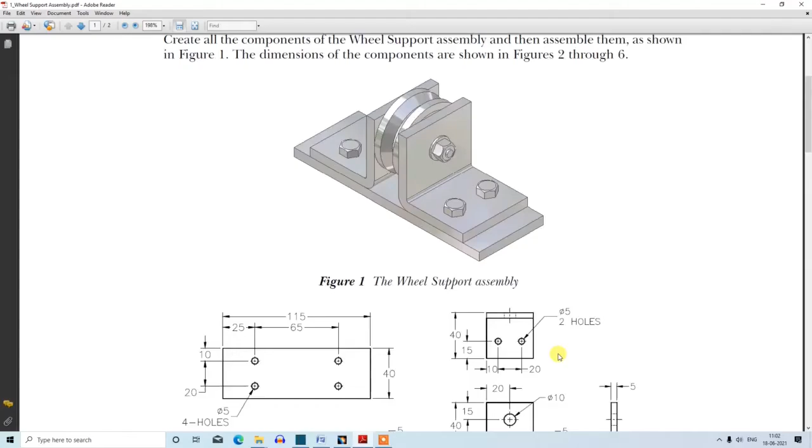So let's begin with the base. You need to have a look over the drawing, understand it, and then we can make it. Possibly try to make each part by hand on your sketchbook. That will really improve your knowledge and understanding of the drawing, and it will also improve the visualization of the part after seeing the drawing. So it is always recommended to make hand sketches and then use the software. It is very easy to use software once you understand the drawing and are able to imagine the part.

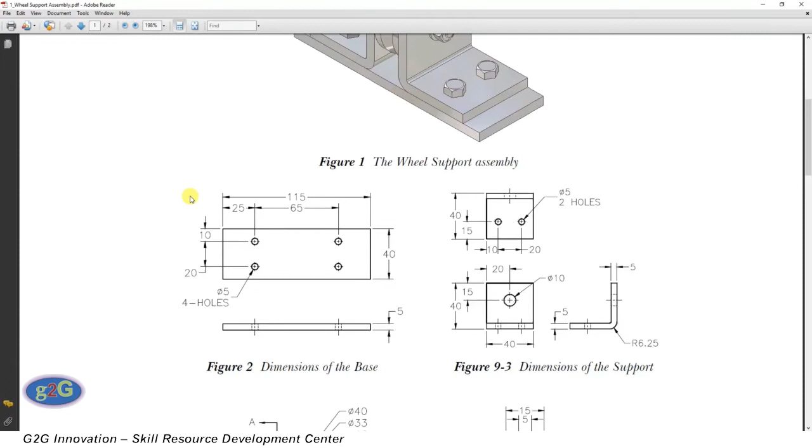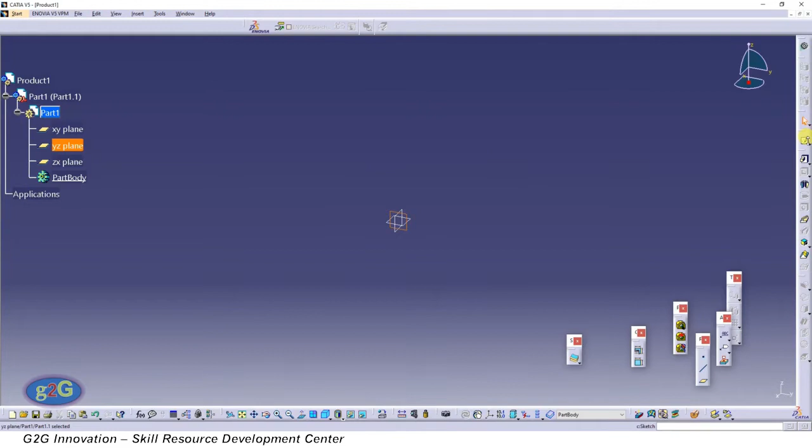So let's begin with this part, that is the base. Let's open CATIA, click on start, go to mechanical design, part design, select a plane. We will select the YZ plane, click on sketch, and then we have a base plate, thickness is 5 mm.

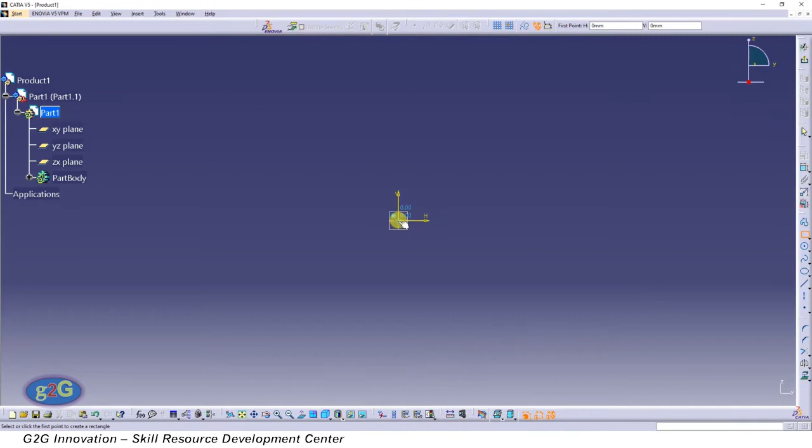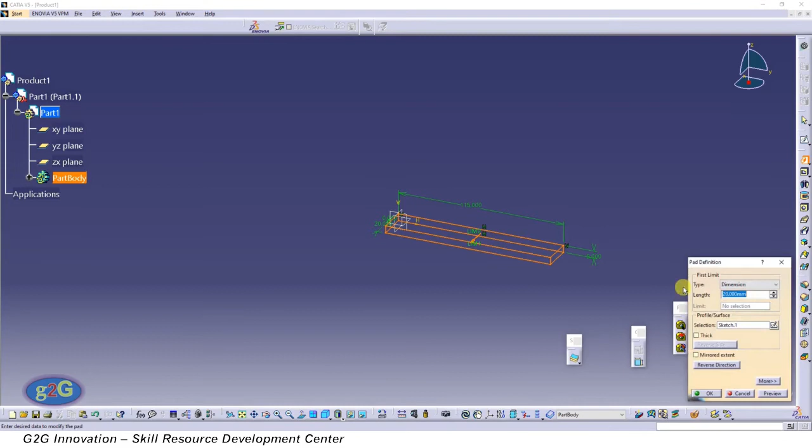So we will make a rectangle of 115 mm by 5 mm. Let's select the rectangle, give the dimension 115 mm, 115, and here we have 5 mm. Let's come out of the sketcher workbench, click on pad, and we will reverse the direction, and we want it to be 40 mm. Preview, click OK.

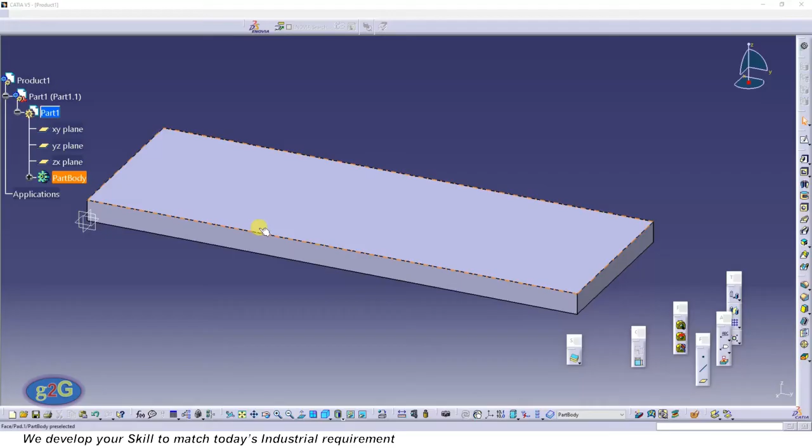So we have a base plate here and we have to put the holes here now. We can do it by two options: either we can use the hole feature here, or we can create a circle on the surface and create a hole. So we will select this face, click on sketch, and we will create a circle.

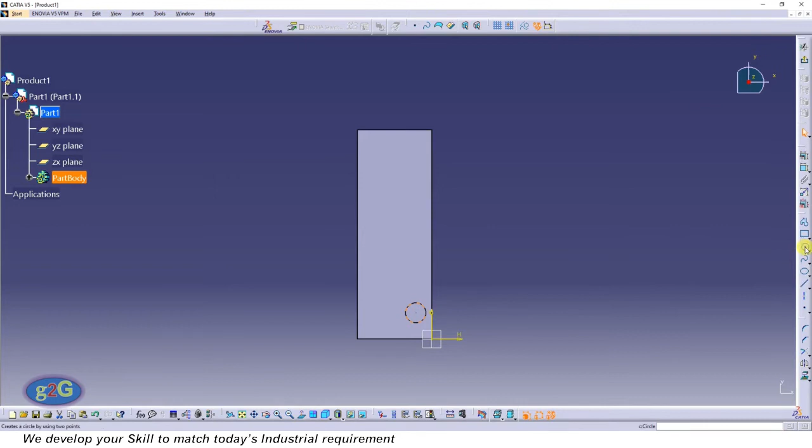Four circles. Let's give dimension to it, and we want it to be 5 mm in diameter. Let's make it 5 mm.

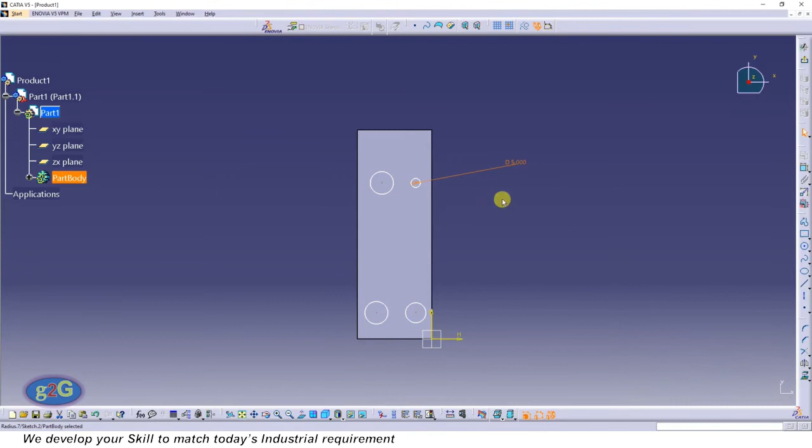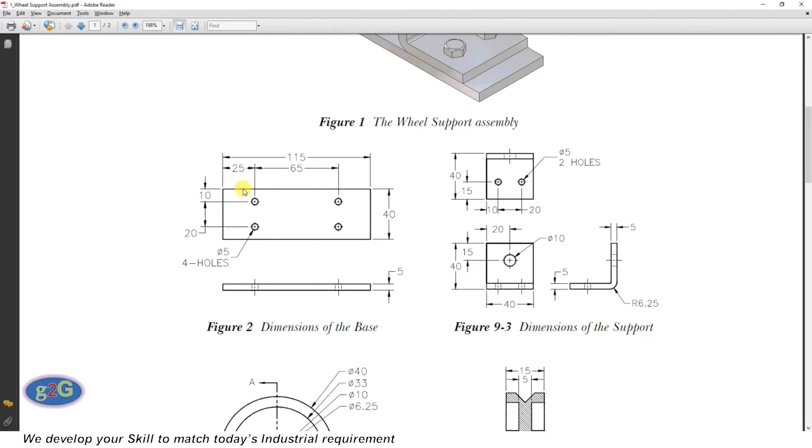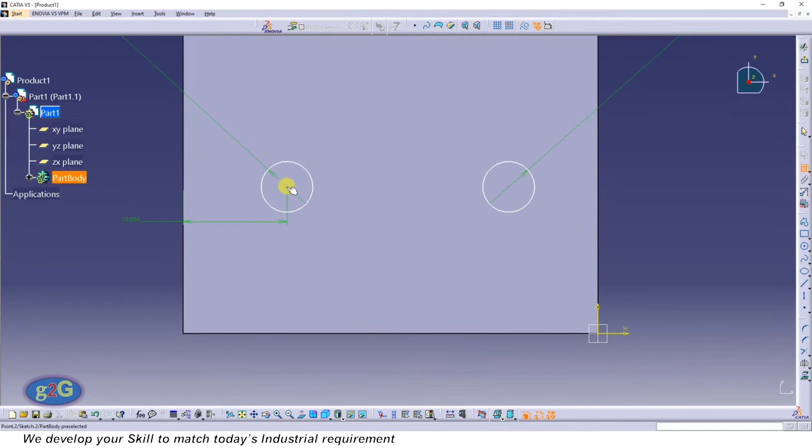Now let's give position to it. So we have each hole 10 mm from this horizontal edge and 25 mm from the vertical edge. Let's give the dimension. Click on this edge and click on this. Let's make it 10 mm. Similarly, from here to this edge it is 25 mm. So let's make it 25 mm.

Let's repeat the same thing to all the circles.

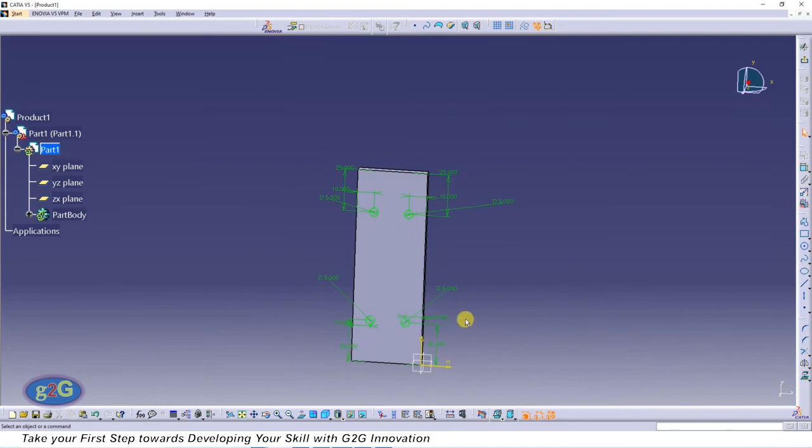Let's exit the workbench and click on pocket, up to next, preview. Okay, so we have a base plate here and this is what we have created.

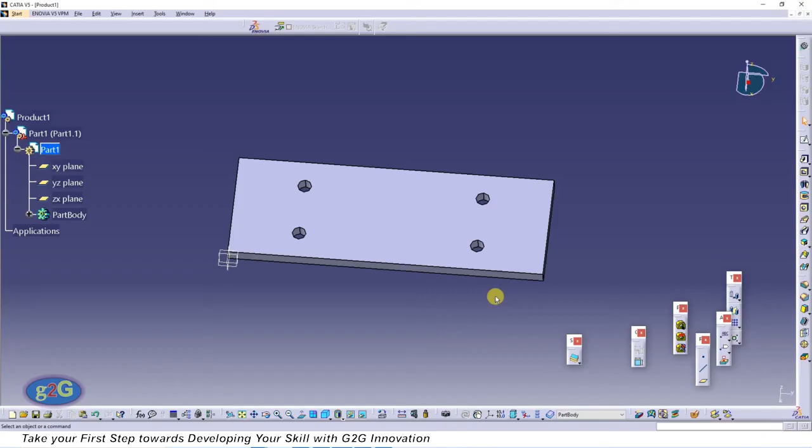Let's save it, Control S. Let's rename it as base. Okay, save.